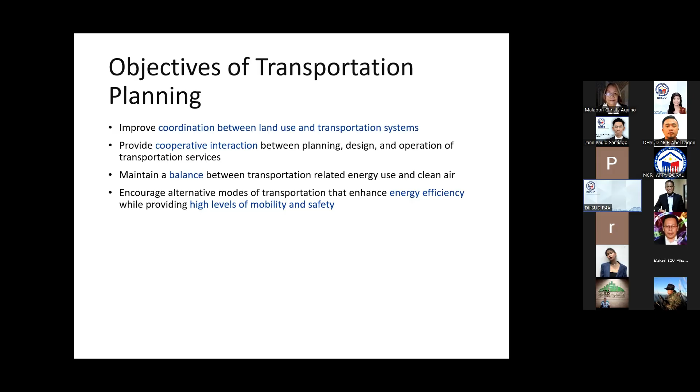And we all know that transportation contributes to the degradation of our air quality, right? We know the contribution of transport. And lastly, it encourages alternative modes of transportation that enhance energy efficiency while providing high levels of mobility and safety.

Okay, just to have a review, this is the evolution of the transport system with urban growth area. I'm sure we are very familiar with this, that the transport system evolves with urban area growth, beginning with sparse settlements, which is commonly traveled by individual cabins. And as the small community is slowly becoming a bigger community...

Additional arterial roads and public transport services are required. Until we get to panel C, as the population increases and socio-economic activities begin to increase, and employment and job opportunities are, of course, inevitable, there's a need to introduce semi-rapid transit to address the increasing demand on transportation. And as it grows into a megapolitan, a megacity...

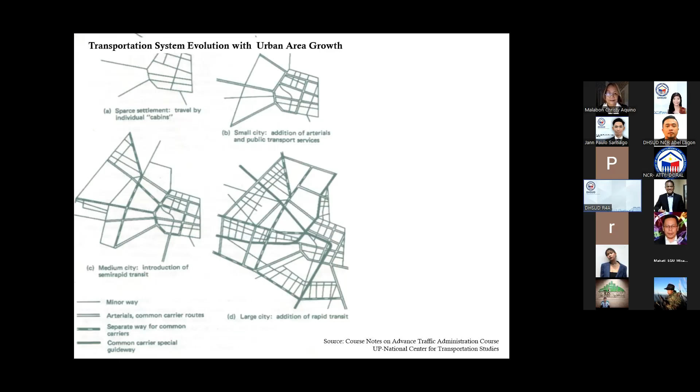So in panel D, when this medium city is gradually growing into a megacity, of course, we need to have an additional or a rapid transit system in place. So that's the evolution. You'll notice that as land use changes, the network or the transport facility also changes.

Now again, travel is not only influenced by the spatial distribution of land use. It is also affected by several socioeconomic variables like income, age, and so on. That's why studies show that if you have high income, you tend to travel more frequently. Of course, you have money, so you want to travel.

And when we are beginning to grow older, we tend to reduce our travel. Based on studies, this is perhaps due to physical incapacities, we are no longer able to travel as much. So that's age, and income also affects socioeconomic variables of travel.

Now, speaking of land use, we already know this. It's the classification of urban land according to type and intensity of performed urban activity. And typically, land use classifications include residential, business or commercial, industrial, and so on.

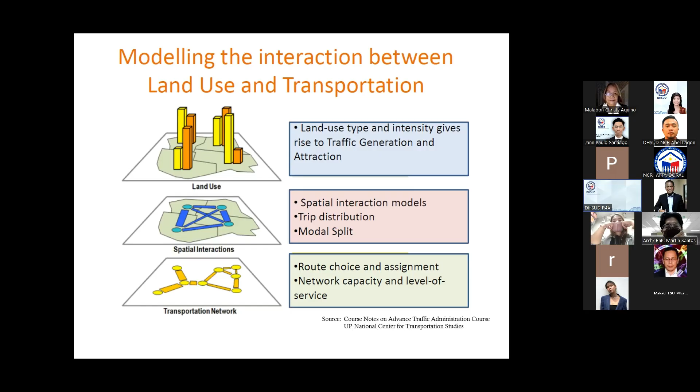Yun yung when we try to model yung interaction between land use and transport, considering yung transportation network. Now, ito lang po yung relationship, how do we integrate community facilities or transport facilities with land use. So parang ito yung hierarchy.

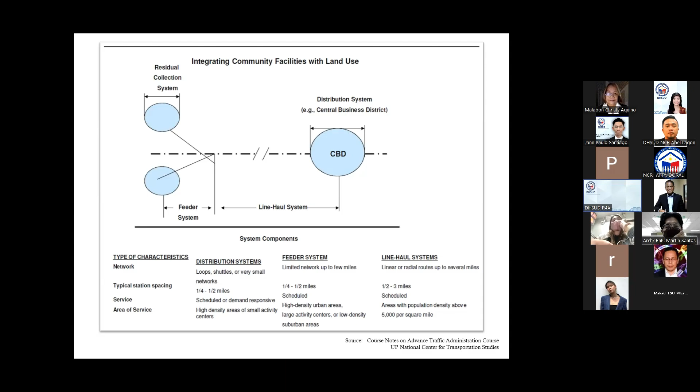So when you have a line haul system, which is normally LRT or MRT, light rail or metro rail transit, kinakailangan mayroong feeder transport na provided. So a feeder transport or feeder system linking the line haul system, halimbawa ito po yung CBD. Then of course, within CBD, you have to have a distribution system. Ito yung mga jeeps or yung mga short haul, yung mga shuttle service and so on and so forth.

Okay, so clearly, there is an interaction, yung land use and transport natin. So when land use changes, there is an increase in trips, person trips. Siyempre, pagka mayroong development, and it attracts jobs, maraming babiyahe, and there is an increase in transportation needs.

Kung mayroong increased transportation needs, we need to change. We need to really have transport facilities to improve accessibility. And then, kapag mayroong accessibility and connectivity between land uses, the value of the land increases. So yun po yung interaction.

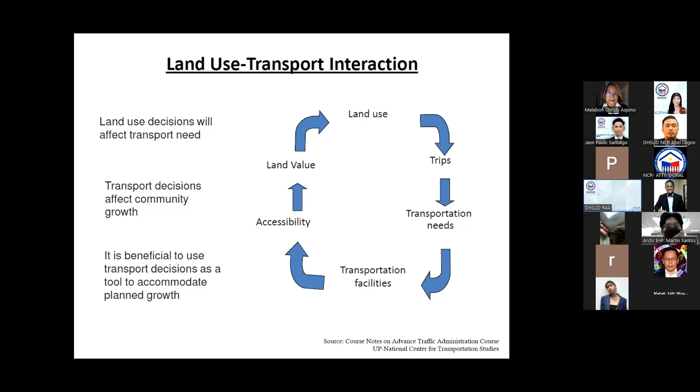So very briefly, yun po yung ating interaction, yung land use and transport natin. Now, if there are interventions or arterial improvements like road widening, pavement improvement, construction of new bridges, roads, there is increased accessibility. Dito na lang experience natin sa Metro Manila, and then we really appreciate the DPWH for constructing several bridges. But along Pasig River, marami namang bridges.

And then it really increased accessibility from one place to another. So pag mayroong increased accessibility, increased land value, the land value will definitely increase. Then land use changes over time. Pagka mayroong pagbabago sa land use, babalik tayo doon sa there would be an increased traffic generation because mag-accumulate ka, di ba? Yung trips mo magi-increase. So there will be more traffic generated as a result of the land use change, and of course increased traffic conflict. Then mag-uumpisa na yun, deterioration of level of service.

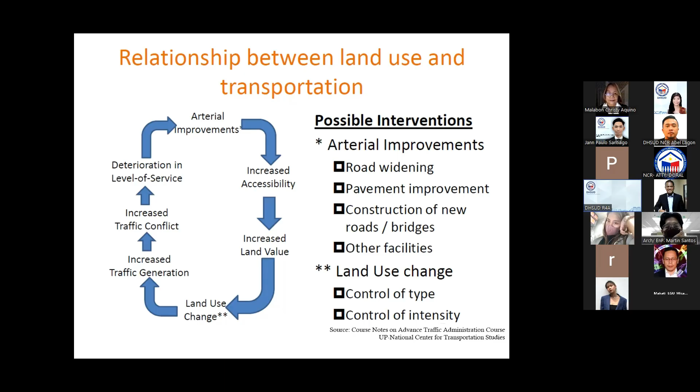When you say level of service, ito yung quantifiable, measurement of the road capacity, yung level of service natin.

So in short, transit shapes urban development and land use patterns influence travel demand. Land use variables reflect not only trip interchange attributes, for example, yung travel time and the cost of travel from origin to destination, but also the attributes of origins and destinations themselves, for example, yung density and degree of land use mixture.

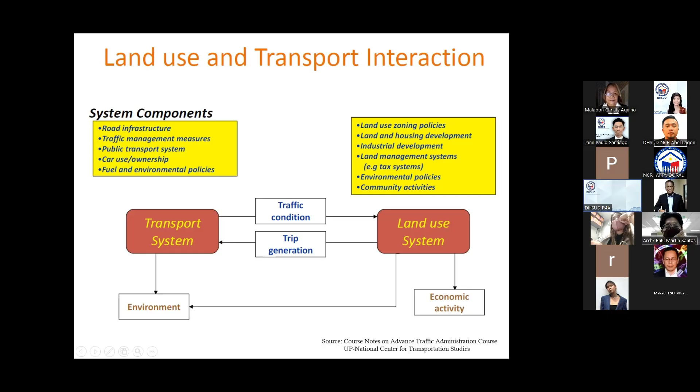Now, the quality of road infrastructure, traffic management measures, and all other transport components define traffic conditions. Ito po yun, while land use system defines the amount of trips being produced or attracted to a particular land use. While both land use and transport improve economic activity, we have to remember that the transport system and land use must also be environmentally sound, dahil one of the components ng TOD is that it should be environment friendly. All components should be environment friendly.

Now, moving on, ito po is nabanggit natin kanina, if we stimulate changes in the transport sector, say improvement of the road network, there will be changes in traffic condition, trip generation, and so on and so forth. Same is true if we stimulate changes in the land use sector.

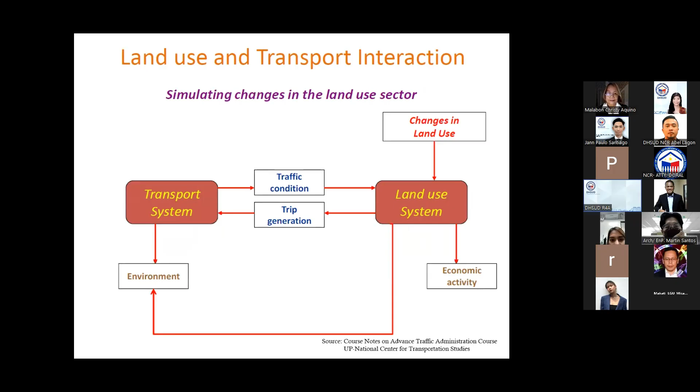It would also change, right? It would affect the condition of traffic, and then trip generation and attraction. So to put it simply, what is the role of TOD in both land use and transport? TOD is both a function of transport and land use, countering urban sprawl and automobile-dependent developments where commutes are made shorter and biking and walking are encouraged.

I'm sure you're aware of the compact city concept. TOD is like going back to our old setup in pre-Spanish times, because if you recall, our land use during those times was such that where the school was, the church was nearby, and where the church was, the public market and park were also nearby. Everything was close together. We're going back to that concept, but of course TOD deals with high density development. It's like returning to the past, but with the intervention of transport or transit.

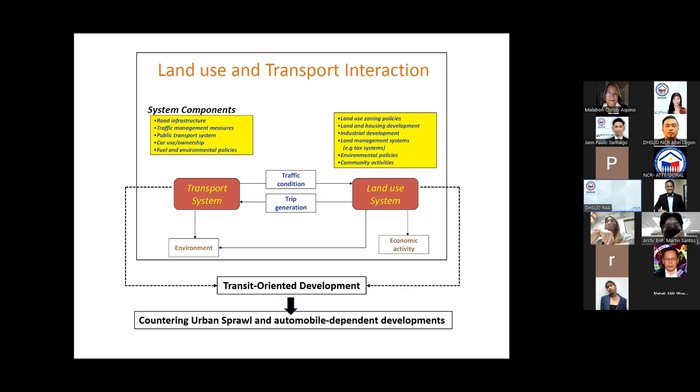That's the idea. Now we move on to the background on transit-oriented development. As the Assistant Regional Director mentioned earlier, that's correct. Transit development is the exciting, fast-growing trend in creating vibrant, livable, sustainable communities. This is also known as TOD. It is the creation of compact, walkable, pedestrian-oriented, mixed-use communities centered around high-quality transit systems. This makes it possible to live a lower stress life without complete dependence on a car for mobility or survival.

TOD is regional planning, city revitalization, suburban renewal, and walkable neighborhoods. We are now embracing this concept across the nation as the most desirable places to live, work, and play. Real estate developers too have quickly followed to meet the high demand for quality urban places served by rail. That's why if you notice along MRT3, along EDSA, high-rise buildings are sprouting up there. Residential buildings are sprouting up, developers are competing with each other now, okay?

Transit-oriented development is also a major solution to the serious growing problems of climate change and global energy, because what we're espousing here is shorter commutes - we shorten the travel. And our objective here is to discourage car usage, the use of private vehicles.

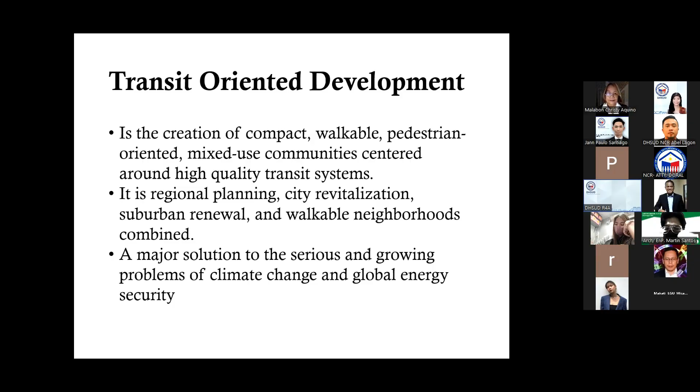Anyway, before going further, let me show you some of the existing TODs along MRT. These are commonly mixed-use developments directly linked or located proximate to the transit systems. However, this is only based on my personal observation, subject to technical evaluation and assessment as to whether they conform with the various transportation and land use policies or standards.

Because there are existing developments or land uses along EDSA prior to the construction of the MRT, which are now transforming into transit-oriented developments. So the landscape of EDSA has changed. Before, when the MRT wasn't there yet, you'd only see one building standing - if I recall, that was SM North. Now there's also Trinoma, and going south there's Centris and so on.

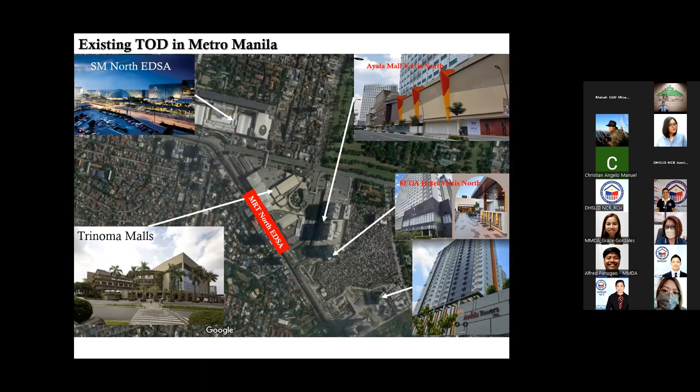So first on the list is our MRT North. You have Trinoma Mall, SM North EDSA, Ayala North, Vertis, and then the Seda Hotel Vertis North and Aviva Towers, just within the MRT line. That's where developments have sprouted. And if you'll observe this EDSA SM North area, there's now a park in front of it too. They're developing and changing the landscape.

And at our MRT Quezon Avenue Station, this is what I mentioned earlier - we have the Centris Station, Eton Centris, just near the Quezon Ave station. Once you get off, that's it, you just walk.

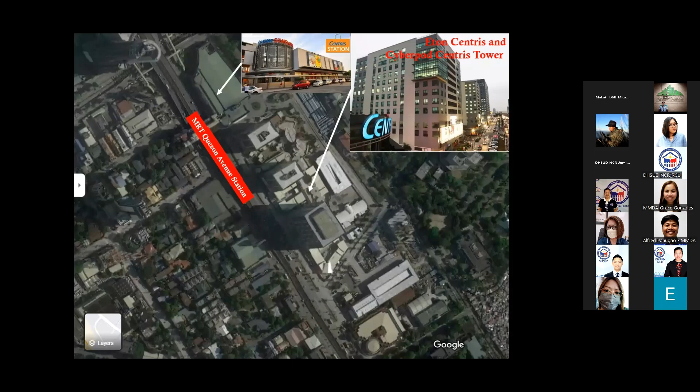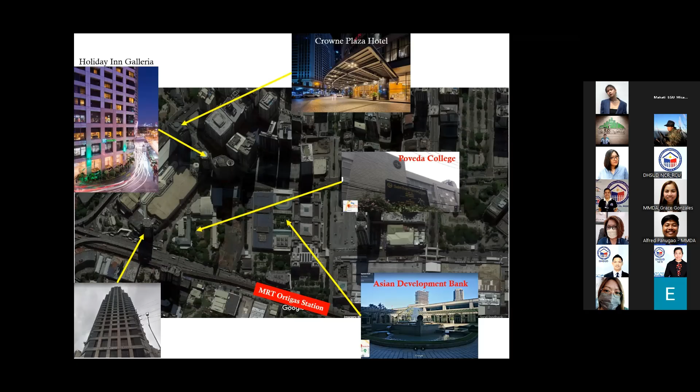If you visit the vicinity of Ortigas, marami nang nakatayo as suitable for TOD. Meron Poveda, meron educational institutions, hotels, residentials, and so on. Saan ba to? Shaw Boulevard, meron na rin, nag-uumpisa na rin. Nandiyan yung SMDC Light Residences, kung hindi ako nagkakamali, at yung SM Mega Mall natin. Binago na nila yung harap nila, meron BPO na dyan.

Ang sinasabi ko lang po rito, baka mapansin niyo, baka meron pang kulang doon sa existing TOD natin. Siguro pwede nating sa inyong respective localities balikan, ano bang pwede natin i-improve o kulang insofar as TOD development is concerned.

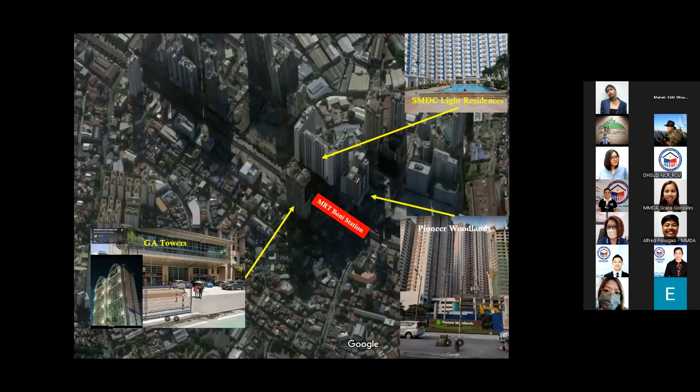So Boni, medyo fast track na lang natin. Boni, meron tayong GA Towers, SMDC Light Residences doon pala sa Boni, I'm sorry, stand corrected, and yung Pioneer Woodlands, mga residential na yan. Halos talagang nagkakasabayan. Then of course sa Ayala, very evident naman dyan.

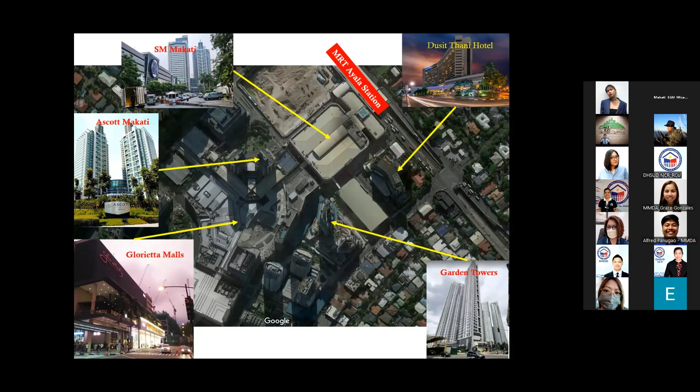Meron tayong existing SM Makati, Glorietta, meron tayong mga parks doon yung Makati Park, yung Ascott, just beside Ascott. And there are other existing TODs, kung napapansin ko dito rin sa Magallanes, meron tayong MRT station doon, meron ng mga residential, may mga condominiums na yata akong naobserbahan doon.

At napakaganda ring place yun, because I do not know kung meron lang access doon sa PNR, sa commuter rail natin, kung ikaw ay bababa doon sa MRT. Maganda sanang tingnan din yun ng Makati City. Hindi ako familiar doon sa lugar na yun, baka mayroon na nga, o baka pwedeng i-develop din yun.

Now, what are the components of TOD? Ito, alam niyo na ho ito: walkable design with pedestrians as the highest priority to discourage car use, train or transit station as prominent feature, public square fronting train stations, and a regional node containing a mixture of uses in close proximity.

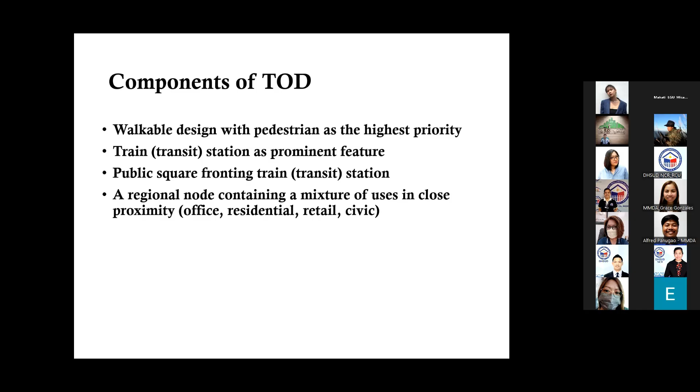Dapat makakalapit, may office, residential, retail, and so on and so forth. TOD is a high density walkable district within a 10-minute walk circle. Although of course in other areas, kahit na yung walkable distance mo, ganun kalapit, pero kung minsan mabagal ding pumunta doon dahil may mga friction sa kalsada. So ang paglalakad mo hindi, 10 minutes from your residence to the transit station.

Like for instance, ito napagandang i-develop dito sa may Boni, dito sa station natin. Residential dito, may mga residential, may mga communities doon. So yung accessibility lang kasi ang question doon.

Then collector transport support transit systems including streetcars, there are light rails and buses, and designed to include the easy use of bicycles and scooters as daily support transport.

Doon po sa Marikina, hindi ko lang alam, isa sa mga proposal na hindi ko siguro napansin, maganda sana kung yung ating light rail stations, yung mga LRT stations natin, meron ding bicycle parking area within stations. Kasi kung meron na bike lanes tayo linking residential to the transit station, may bike lanes dyan, you can ride on a bike and take the LRT. Maganda sana kung merong connectivity.

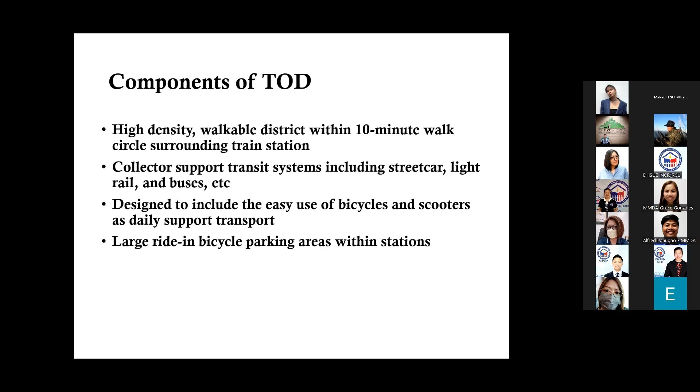Bike share rental system and bikeway networks integrated into stations, then reduce or manage parking inside the 10-minute walk circle around the town center. Isa po sa mga very good feature ng isang TOD is that we have to limit the parking slots doon sa transit stations or within the core transit station, kasi para ma-discourage yung paggamit ng sasakyan.

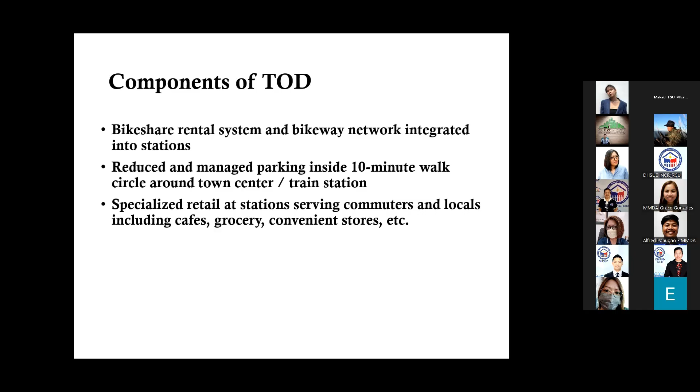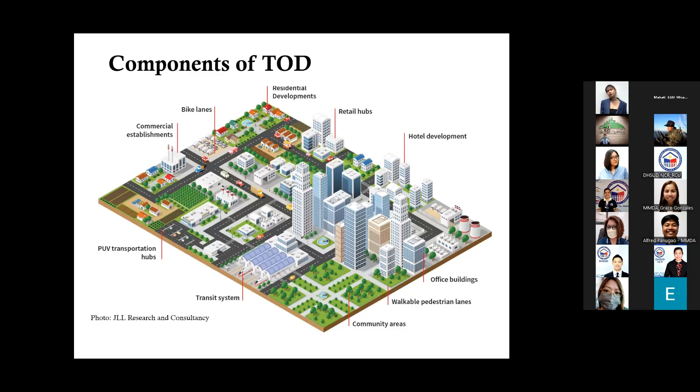Halimbawa, 5 kilometers away from the transit, or a walkable naman, 1 kilometer, let's say a walkable distance, so iwan na lang yung sasakyan doon. That's one of the important features of TOD, yung merong konting TDM, travel demand management na dapat din i-impose. Medyo marami pa itong discuss, anyway, so ito lang po ang very simple picture, how do we look at the actual component sana ng TOD.

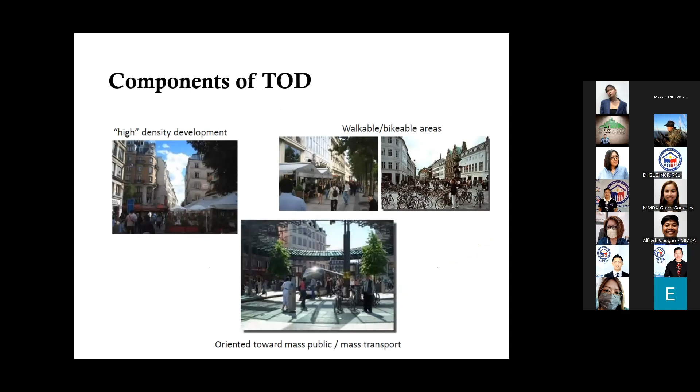So again, TOD is high density development. It's walkable and bikeable areas, and it is oriented towards mass transport. Now, benefits: it can bring a sustainable approach to urban development because TOD focuses on dense centers rather than low-density car-oriented growth, and it reduces the need to convert available spaces into development. Number two, it can provide mobility options by creating activity nodes linked by public transport.

TOD provides important mobility options, or intermodal connectivity, much needed in the congested zones of metropolitan areas. This will also allow young people and elderly who do not own cars, or prefer not to drive, to be more mobile with the ability to use multiple modes of transportation for point-to-point travel.

Number three, it can increase public safety and sense of place, by creating active places that are busy through the day and the evening, providing eyes on the streets. Of course, there are safety features. TOD helps increase safety for pedestrians, public transport users, and many others. The increased focus on pedestrian-centric areas also promotes an improved sense of place.

And four, it can increase public ridership. TOD improves efficiency and effectiveness of public transport service investments by increasing the use of public transport near stations by at least 20 to 40%, and up to 5% at the overall regional level.

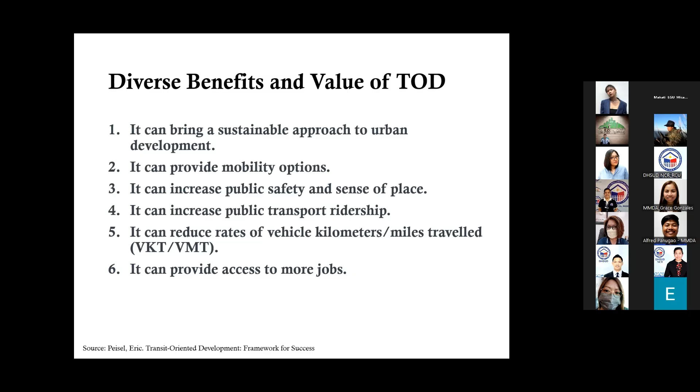Number six, it can provide access to more jobs with added public mobility options. Households of all income can access greater job pool. Of course, that's also a feature of a TOD, where the employment density should be high.

It can reduce air pollution and energy consumption by providing safe pedestrian access to public transport. TOD can lower rates of air pollution and energy consumption, and it can also reduce rates of greenhouse gas emissions by 2.5 to 3.7 tons per year.

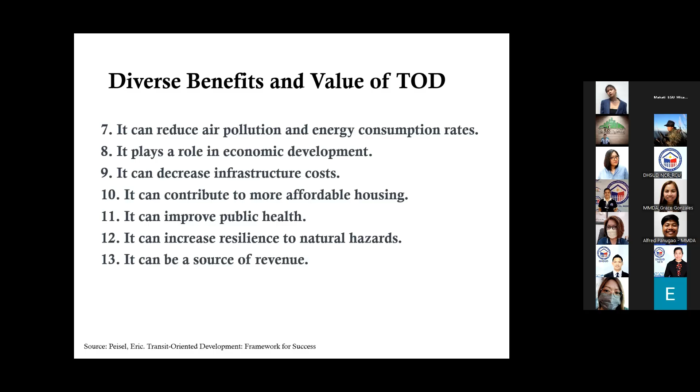It can decrease infrastructure costs, contribute to more affordable housing, improve public health, increase resilience to natural hazards, and it can be a source of revenue, particularly to local government units.

Now that we've seen several transit lines that are in operation, while others are being developed or proposed, the next big thing for us is: are we prepared to embrace the concept of transit-oriented development in our locality? Are we inclined to accept the TOD concept, or are we going to go for TOD, or just be hesitant to introduce it?

Now let me share with you, there are models here. The first question is: when and where do we start? Where should we begin? TOD can start with existing connectivity, or with no existing connectivity, or with an existing facility.

While TOD can call for development centered around existing transport infrastructure, another way to initiate TOD is through the introduction of new transport infrastructure, stimulating the regeneration of previously inaccessible locations, or brownfield development, which means these sites were once used mainly for industrial purposes. So when you say brown, you know that already. But the take home here is...

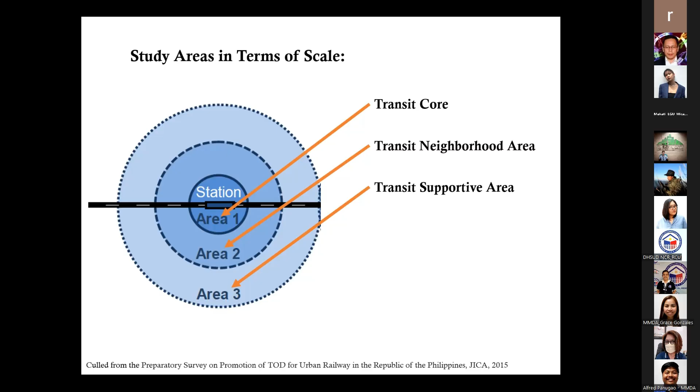And then area 3 would be the transit supportive area. This is the potential catchment area accessible by local feeder transportation such as jeepney. So accessible distance from the station can vary according to the development in the local community. Like for instance, I think in Makati, meron silang loop service na dumadaan, or hindi naman dumadaan na ang unloading ho nila ay malapit doon sa MRT. So that would be a very good example.

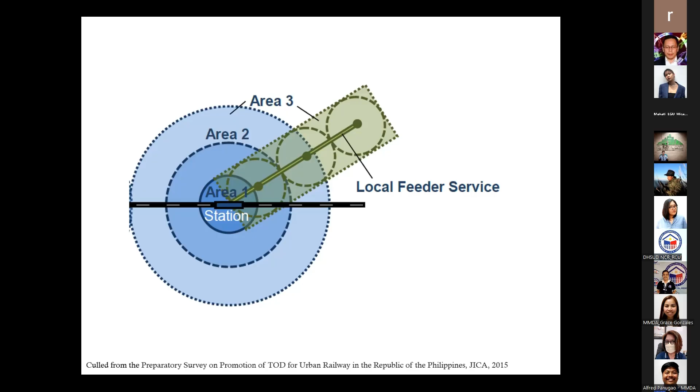Now, speaking of local feeder service, it is also important that a local feeder service be developed that would cater to the commuters within or outside the supportive area, so dito sa area 3. So that high ridership could be maintained along with bike lanes and walkable streets. Yun lang po naman ang isa sa mga characteristics ng TOD. Because we wanted to increase ridership of transit, then we have to provide connectivity from, let's say, residential, or we have to provide local feeder service.

Now, what are the 3Ds in designing TODs? There are 3 considerations. Number 1 is density. Density deals with the concentration of users within the immediate vicinity. For various reasons, we've observed that planners, residents, or even politicians of most high-density cities in developing countries have a desire to deconcentrate and spread development to new areas rather than increase density in existing built-up areas.

So palagi nyo nasasabi yung decongesting Metro Manila, di ba? Para ma-decongest tayo, we have to create another city and so on and so forth. So it is widely believed that cities in developing countries cannot accommodate additional growth or densification in built-up areas. Indeed, city authorities tend to consider population growth and the limited carrying capacity of the city as prime causes of chronic gaps between the demand for and supply of urban services, or their low quality.

We tend to prefer development of peripheral greenfield, yung new developments that take place on lands that are not previously developed, rather than urban development in the city core. Because, of course, greenfield development is mas madali, faster and costless.

That's the effect - we are just creating car-centric developments.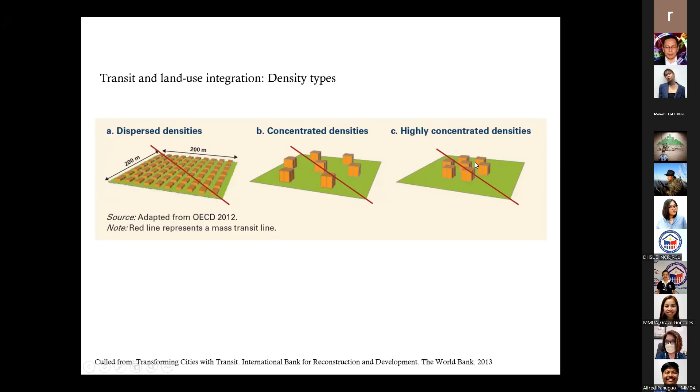Now, in determining whether an area is suitable for TOD, we have to consider high concentrated densities. What matters most for transit and land use integration is not the average population densities, but articulated densities, meaning these densities are strategically distributed across parts of the metropolitan area. The most suitable for TOD is highly concentrated density, because TOD is high density development.

I won't dwell on this lengthily since our environmental planners and architects already know this well. Design includes urban block sizes, street patterns, parking areas, streetscapes, gateways, and so on.

Blending good urban design with compact mixed-use TOD becomes an effective tool for attracting outside investments - knowledge-based companies and other businesses. That's why our BPOs are like mushrooms now, sprouting along EDSA, especially those near our LRT stations.

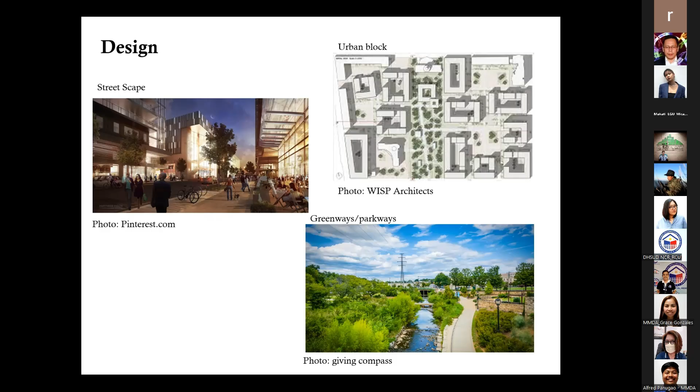This is an example of the eco-block concept, meaning there should be dedicated off-street paths, easy and direct pedestrian and bicycle transit access, good signage, short direct connections between transport modes and transit facilities, and effective parking management around stations.

I'd also like to point out that within the 200-meter radius from the transit station - as a practitioner in traffic and transport management - it could be better to avoid vehicle traffic within that 200 meters. Because if you mix pedestrian traffic with vehicle traffic, we'll have problems with the level of service, both on pedestrian and vehicular traffic.

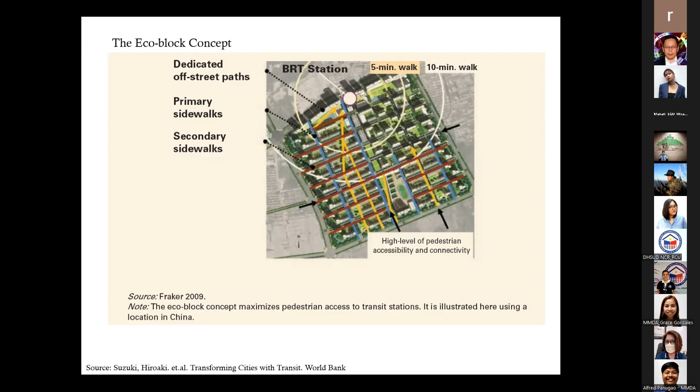I hope you're aware of this - the 3V framework, as propounded by various experts in the field, most particularly by Ollivier and Salat. The 3V framework is a methodology for identifying economic opportunities in areas around mass transit stations and optimizing them through the interplay between node, place, and market potential values.

I'd like to dwell more on node value, because this has to do with transportation planning in TOD. Place value relates to land use, and market potential value is the interplay between supply and demand. Let me know if I'm talking too much - I'll just skip some of my slides.

In the 3V framework, node value describes the transportation and connectivity aspect of TOD - the importance of a station in the public transit network based on passenger volume, ridership, intermodality, and centrality within the network.

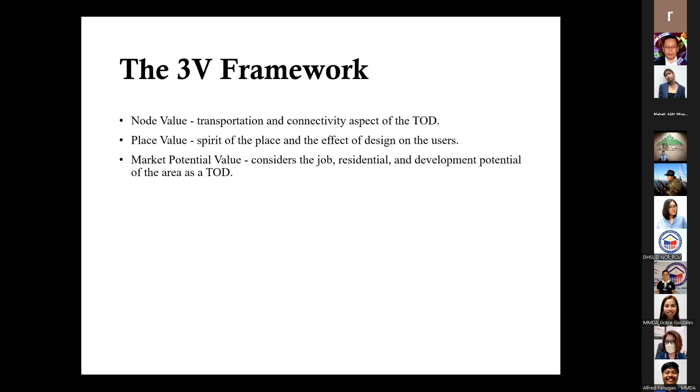Now I'd like to concentrate more on transport nodes. What are nodes and what are links? A transportation network is generated using different sets of nodes and links. Nodes are commonly referred to as the intersections of transportation lines, or transport hubs, or transport interchanges.

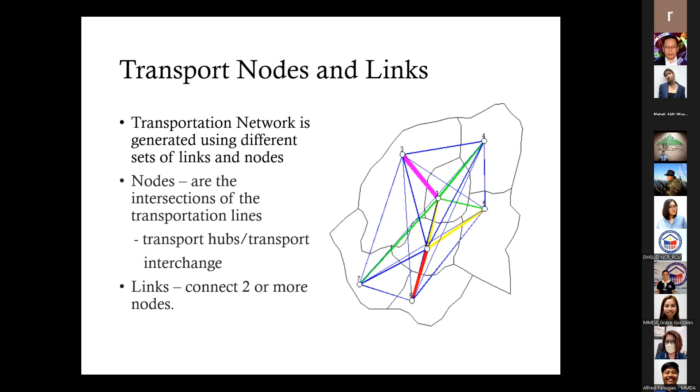Nodes are often connected by links. Hubs are the most important. This picture I took is of PITX. I'm not sure if there's a rail station there, whether the LRT Line 1 extension from Baclaran to Cavite will have a station there or an LRT station. Well, I do not know.

That could be a very good transport hub because there are different types of modes present there - buses, jeeps, and so on. So hubs are the most important nodes. A transport hub is a place where passengers can switch between lines or between transport modes. Public transport hubs include subway stations with multiple lines, or train stations, and so on and so forth.

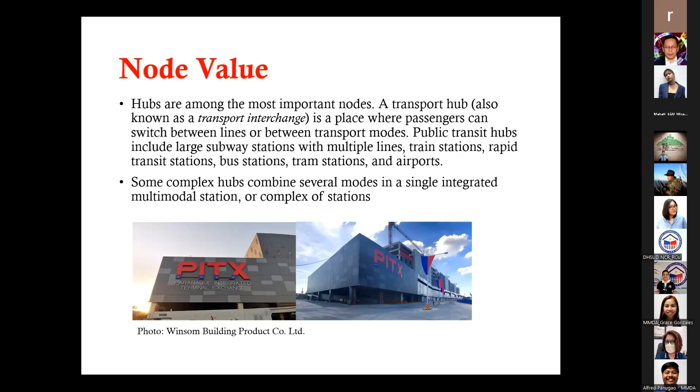Maybe there is, I just don't know the plan - perhaps there's a rail transit station there for the LRT. The number of lines and modes connecting a hub defines its importance. Meaning, if many lines are connected to that particular hub or node, the more successful our TOD will be. So intermodality matters, because there are many modes of transport.

Now, just to show you the hierarchy of nodes - we have connective hubs which offer transfers between many lines and transport modes. For example, in Shinjuku, Japan - what's that station called? Shinjuku, I think. There are many hubs there. That's a highly connective hub because it really connects so many lines.

Then there are core transfer stations, which connect two or more, or three lines. Then one single line stations, which radiate from the core of the network. Now, how do we leverage the node or increase its value?

Number one, of course this is costly - increase the number of hubs and the number of lines or modes they connect to. That's one. Interlink neighboring stations into clusters - that's why we have what's called adjacent developments. And then, increase accessibility for all within the network.

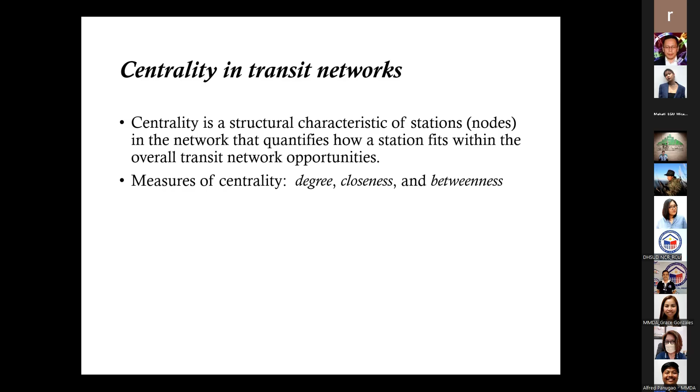Now I'd like to discuss this briefly, since this is on the transport side. Degree centrality is the number of links per node. It is an important property of many networks. The highest degree centrality means there is the highest growth potential for that particular TOD.

Meaning, if many links are connected to or present at a particular node, as you can see in this diagram, if there are many links, the growth potential is highest and the TOD is more suitable. Because, number one, ridership will increase, and the mix too, and the frequency of service should also be considered. So if there are many links, the TOD is more suitable in that area.

Closeness centrality expresses the average distance, measured in number of links, from one station to every other station in the network. So what is the average distance from one station to another? As the term implies, closeness - if the stations are very close to each other, then our TOD might be a very successful one.

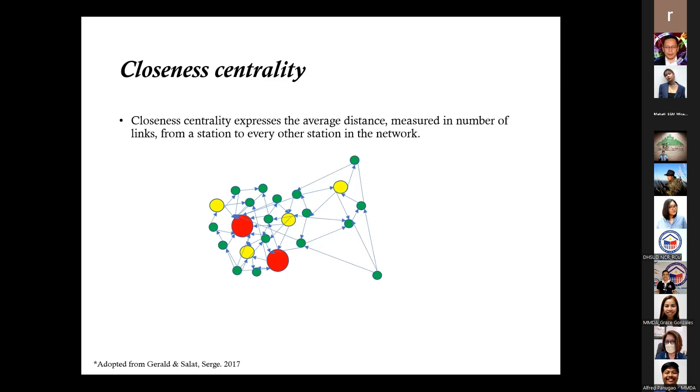Then betweenness centrality - the extent to which a transit node is located at the crossroads of the public transport network.

Example, if you look at this sketch or diagram, this is adapted from the book of Gerald & Salat, 2017, World Bank. If there are many passengers, the number one reason is because when a passenger has several choices to choose from, it's better if the attractiveness of a station or transit station is high. So a station with high betweenness centrality has a large influence on the transfer of passengers through the network.

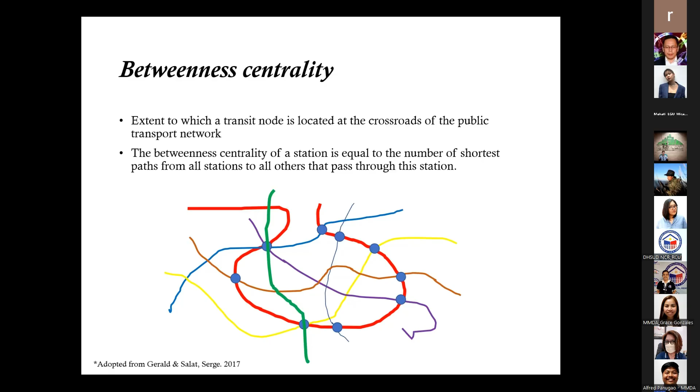So that's one of the determinants or indicators that an area is very suitable. And this also includes the intensity of node activity, which captures the strength of traffic flows in a node. It can be described by the frequency of departures of public transportation and the daily ridership of a node, which is a comprehensive measure of node activity. Meaning, if there's more ridership, the higher the daily ridership, then the area is more suitable for TOD.

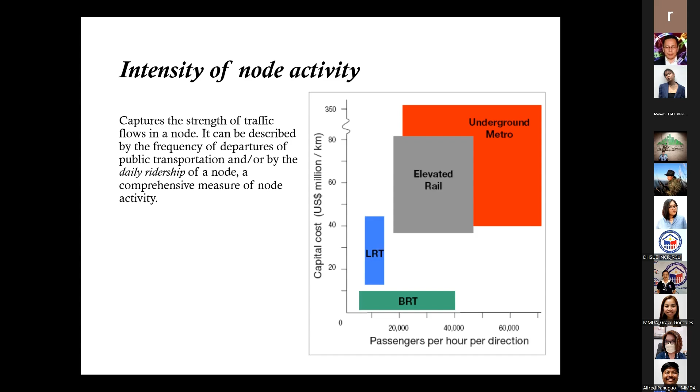Like I mentioned Shinjuku Station in Tokyo. I think, if I'm not mistaken, that transit station in Tokyo produces a daily average of 3.5 million passengers a day, one of the highest in the world. Then intermodal diversity refers to the number and variety of transportation modes a station connects. As I've said, if there are many modes present in that particular node, then our TOD will be good, our TOD will be successful.

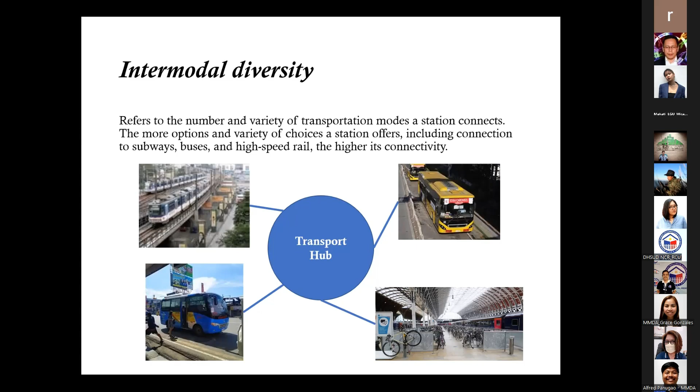So that's one of the indicators. I would rather wrap up now, since we have the last 10 minutes. I would like to omit the place value, potential value. Again, as we have discussed previously, I would like to concentrate more on the transport side.

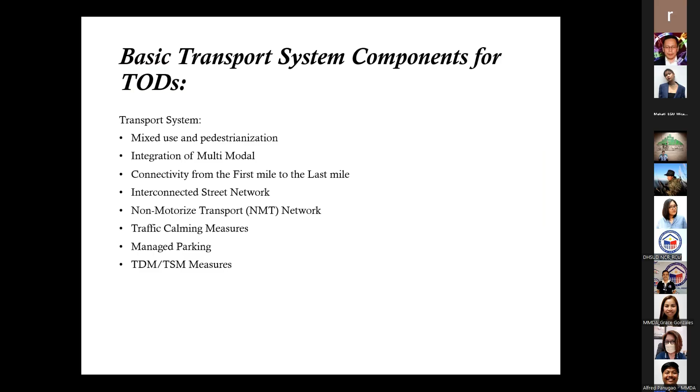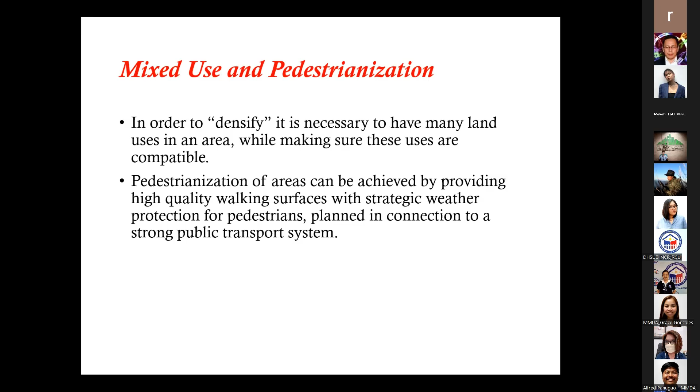The node value, how do we attract, how do we increase the value of this node? By ensuring that basic components or basic transport system components of TOD are present. Number one, mixed use and pedestrianization. We have to densify, and in order to densify, it is necessary to have many land uses in that particular area. The pedestrianization of areas can be achieved by providing high quality walking surfaces. We already know that.

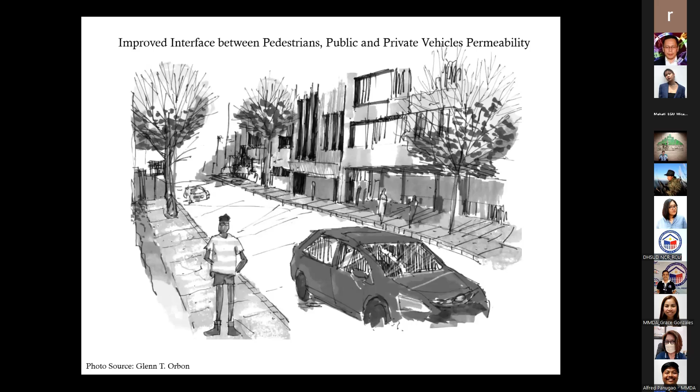And to achieve and improve the interface between pedestrians and public and private vehicles, we need to observe permeability of the location. Meaning, permeability refers to the extent to which urban forms permit the movement of people and vehicles in different directions. We have to examine the level of service of the walkways we design or the existing walkways, because this is very important. If we want to increase ridership of the transit, the commuting number of pedestrians will certainly rise, but maybe our walkways won't be suitable anymore.

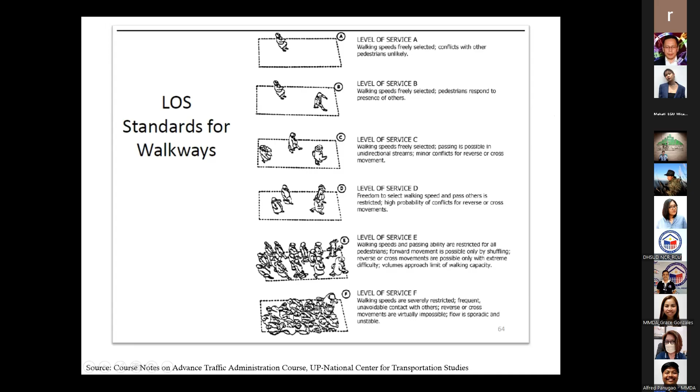The level of service might become E or F, which is not very conducive. Perhaps we should make sure the walkways don't reach that level. Again, there should be pedestrian priority areas, with maximum separation of pedestrians and vehicles. That's why it's good that our approach has physical separation between pedestrians and vehicles, because if we mix pedestrians and vehicles, then we have a problem. Pedestrian networks, to and from school, stations, residential areas, these are needed, at grade.

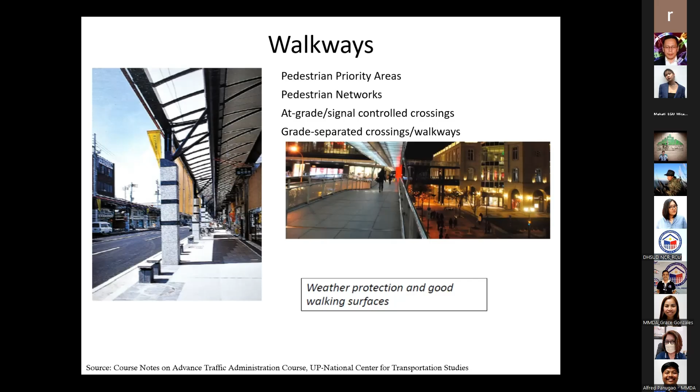Or what about signal or controlled crossings? Are there pedestrian refuges? Are there grade separated crossings or walkways? That's what we saw in LOS. I'll skip that. Now, we already mentioned the integration of multimodal transport, which we should see done properly, with connectivity from the first mile to the last mile.

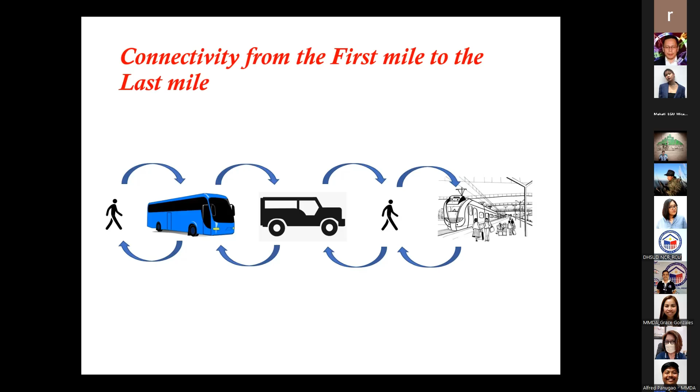If our first mile is through walking, then it should be the same way, there needs to be connectivity from the first mile. Are there pedestrian facilities? Are there transport terminals or access leading to transport terminals? So there should be continuous connectivity from the first mile to the last mile. Then let's not forget active transport, that's one of the things we should look at too. The convenient distance for walking to public transit stations is between 400 to 800 meters.

That's one of our measurements there. And the distance will increase 1.7 to 2.3 times for bicycles, if you have bike lanes. So we need to consider the bikeable distance as well, it's not so much of an issue.

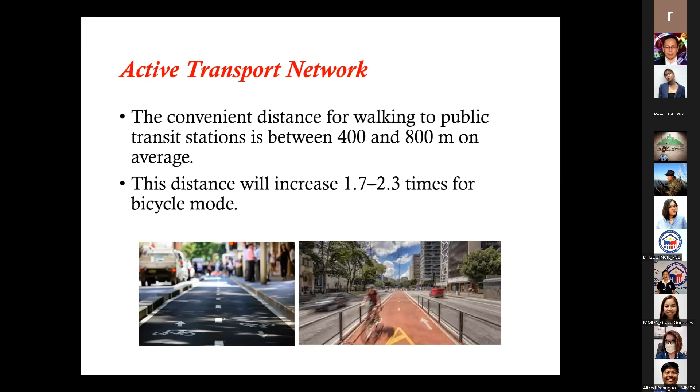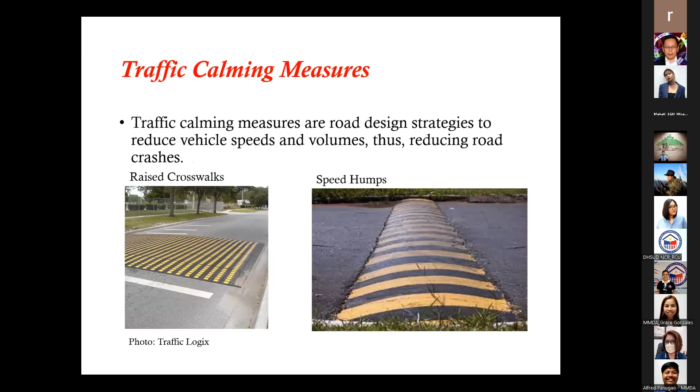Kung masyadong malayo, baka hindi na tayo maka-attract ng ridership. Anyway, let us not also forget traffic calming measures to prevent road crashes or to reduce vehicle speeds at the transit areas.

These are just examples of traffic calming measures. Basta dapat mayroong pedestrian refuge and control signals for pedestrians. Huwag natin kalimutan yan.

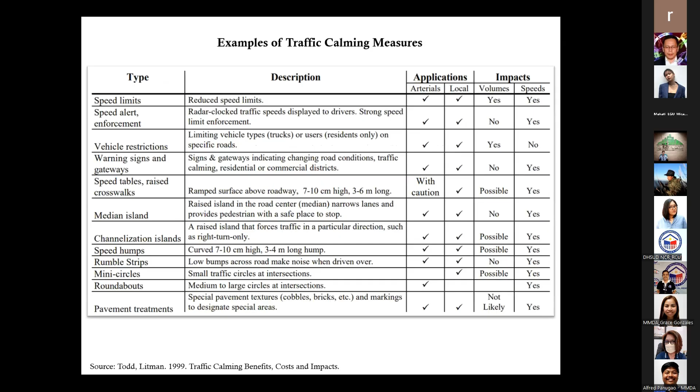At let us also not forget itong demand management measures natin. We have to limit at least parking spaces at TODs, impose on-street parking restrictions, parking correction fee kung kinakailangan, and improve or introduce park and ride facilities within the TOD.

So we move now on to the suitability index. There are readily available toolkits that may be used in assessing TOD, but I find this suitability index developed by a particular scholar na talagang medyo maganda at madali siyang intindihin.

The TOD suitability index is a multi-criteria site analysis and assessment tool that considers the three main values: node value, place value, and market value. Napakasimple lang ho ito tingnan.

So in assessing the node value, you have indicators. Assuming that you have assessed that it is within the 10 minutes walk, ang scale or grading scale na binigay dito is 3, 1, and 0. So if you have 3 points, pwede mong kanyan.

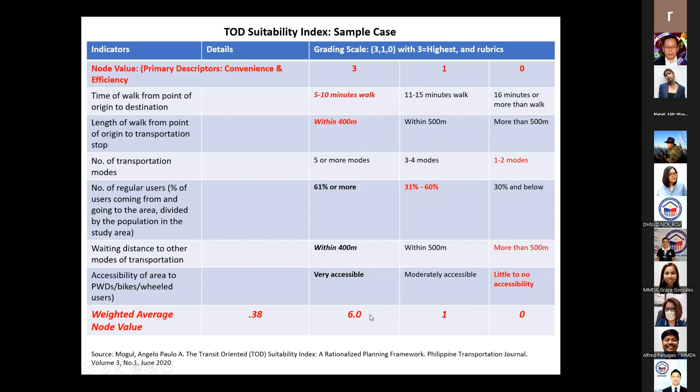I-add lang ninyo yung grading, yung scale for each, and then you get the total score. At we can get the weighted average score by multiplying or dividing the total score, yung TSI score, by the number of indicators.

So halimbawa 0.38. So how many indicators sa bawat scale? I think 1, 2, 3, 4, 5, 6. So i-divide lang natin. So ganun din.

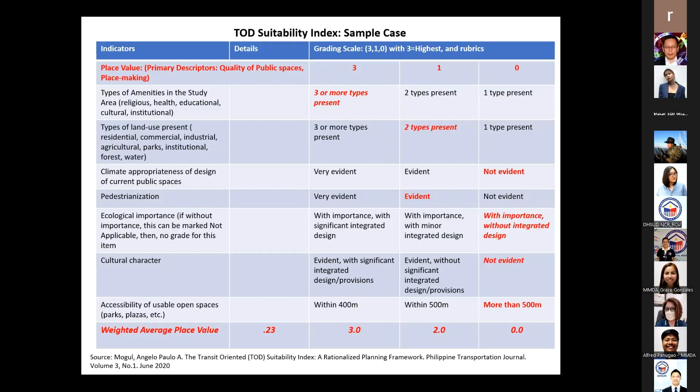We have a tool for determining or assessing the market potential or even the place potential value. Halimbawa, ang weighted average natin na nakuha, let's say, is 0.31 or 31%, and according to the measurements or weighted average na para maging suitable yung ating TOD, if this particular toolkit shows it is below 50%, then the place that we have determined or studied is not suitable for TOD.

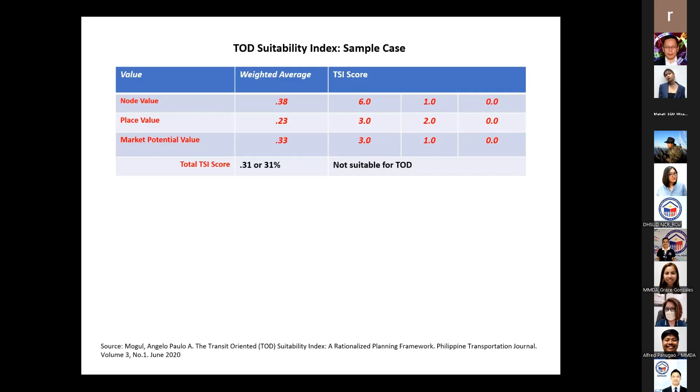So you can look at the transportation journal. Napakaganda ho yung, again, maraming mga toolkits na available din na pwede ninyong gamitin.